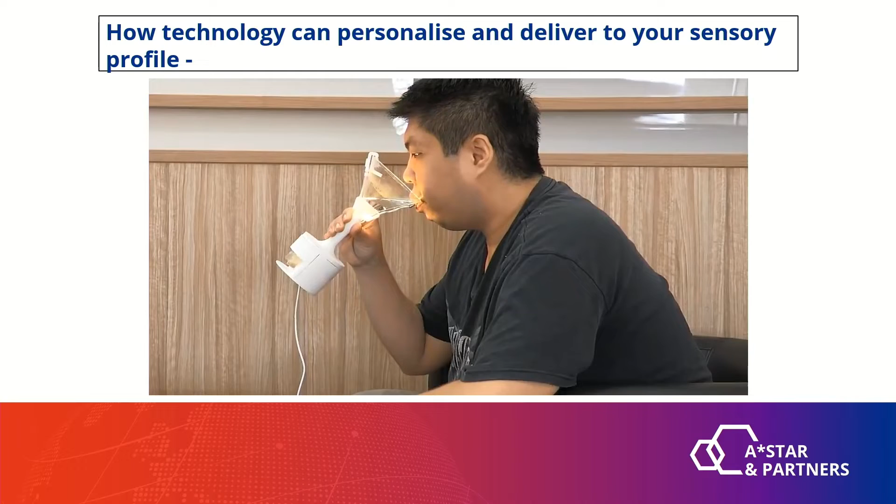Without the need for excessive additives, everyone can enjoy any drink that they want. You can also share drink information with each other, recreating drinks digitally. So even drinking has become virtual, where you can change the color, the flavor, the aroma, and suit it specifically to your need.

Let's talk about another example, Shiseido Optune, which is able to provide you a very personalized skincare system. It can scan your face and identify what your specific needs are, and out of 80,000 possible combinations, figure out the best one that will work for you. Another classic example of personalization.

Wherever there are good margins, wherever the brands are not very big and new brands can find a play, wherever the regulatory pressures are not very high, you can see hyper-personalization rapidly growing. It's already big in cosmetics, it's growing into clothes, it's growing into leather goods, and now slowly coming into the FMCG space. Even in medicines, for example in nutraceuticals, it seems to be making strides.

What are some of the challenges in implementing hyper-personalization in the industry? The first is that if you have brownfield sites with mass-scale production, the change from mass-scale production to hyper-personalization is not an easy one. It is challenging because it would require a completely different infrastructure.

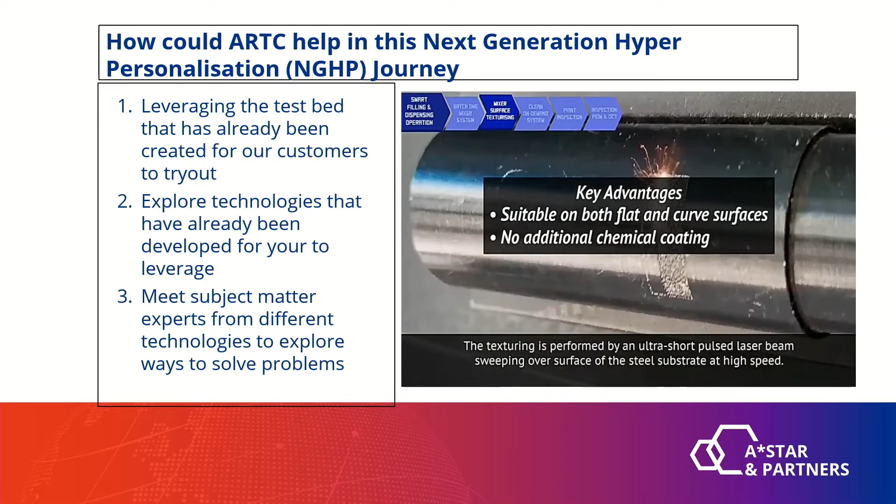Textured surfaces of the mixers minimize fouling and waste, reduce cleaning frequency, and increase process yields. Cleaning systems can be activated on demand to ensure adequate cleaning for the next run.

Every hyper-personalized product undergoes rigorous screening and testing to assure the highest quality for your customers.

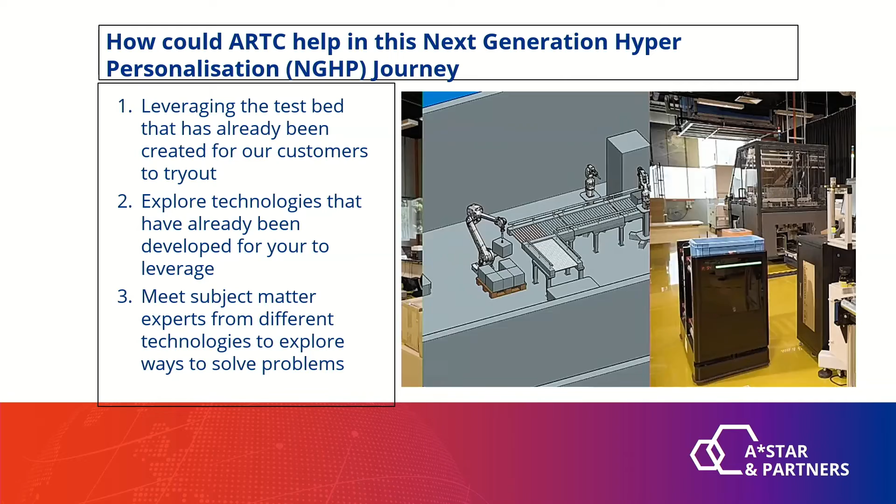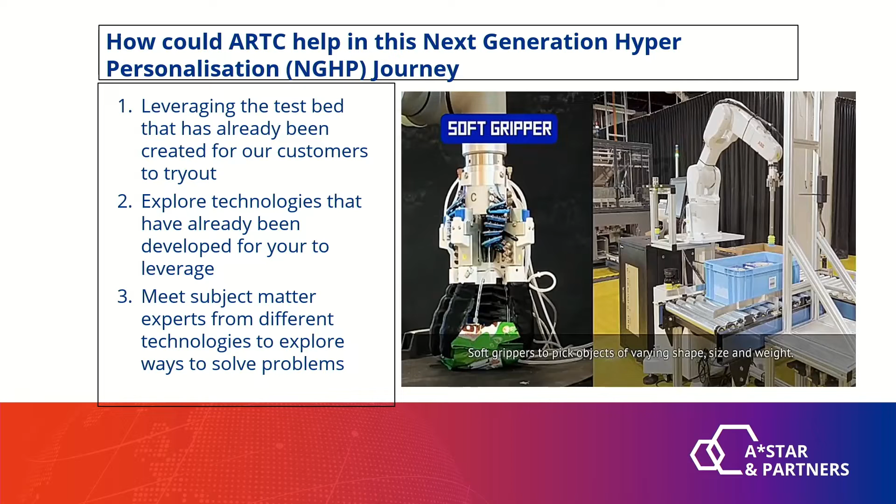Once inspected, our autonomous robots work seamlessly in tandem to consolidate orders from the automated depalletizing line, where cartons of goods are removed from pallets, uncased, and efficiently arranged, no matter how fragile your product. A touch of personalization completes the package, bringing timely deliveries with best-in-class services to wow your customers. Ensure your logistics fulfillment and grow your business.

So we at the Advanced Remanufacturing and Technology Center, which is a public-private partnership, have invested $20 million on setting up this hyper-personalization line, a test bed. You're all very welcome to visit it and see how it works.

If you have products that you want to explore or want to try out, you're again very welcome to connect up with us, and you can meet subject matter experts in different areas. We have already identified about 13 work tracks that we have developed. Some of them are unique and different. And again, as you understand them and test your products, you might be further encouraged to progress on to this process of hyper-personalization.

Feel free to connect up with me at any time if you're interested to know more about this. Thank you, and thank you very much.

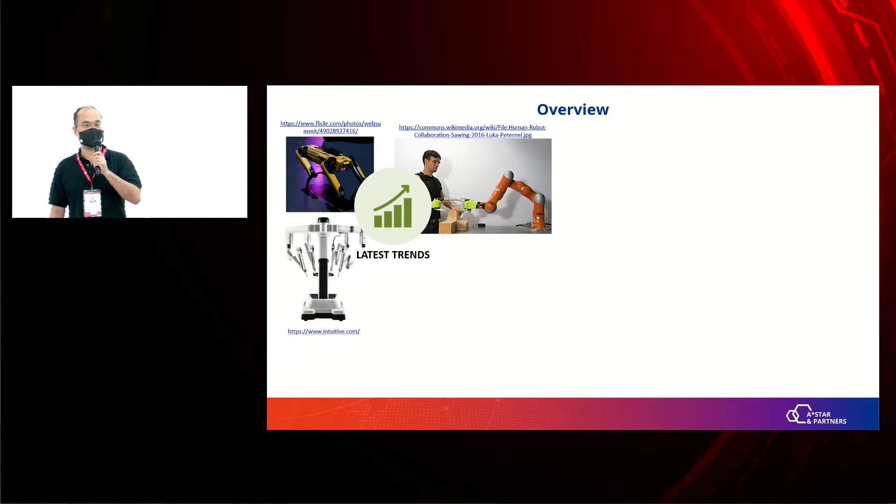Firstly, I'll do a quick cover on the latest trends in robotics, after which I'll take this opportunity to share with you some of our past as well as ongoing work in robotics, as well as some of our past achievements. And lastly, I'll cover sustainability, some of the applications in sustainability, as well as the role of robotics in these applications.

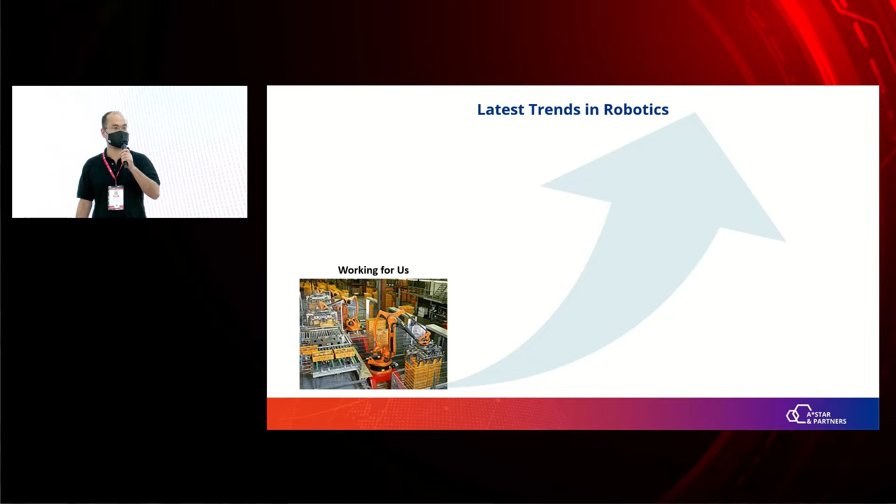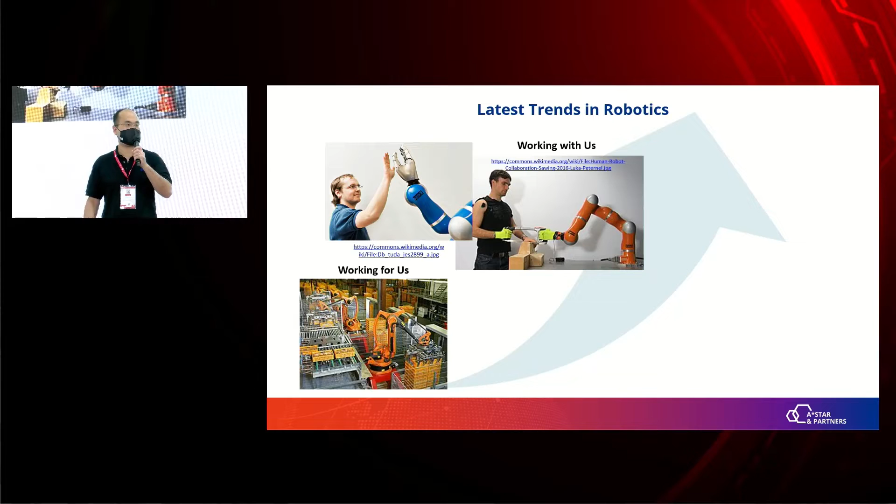Robots used to work for us, performing repetitive actions in cages, separate from humans, with no contact with humans and the environment, and unable to react to uncertainties. Slowly, with advancement in robotics, robots are starting to be able to work with us through the use of sensing, as well as intelligence capabilities, so they are able to take in information from the surroundings and react to them, performing their work around with us.

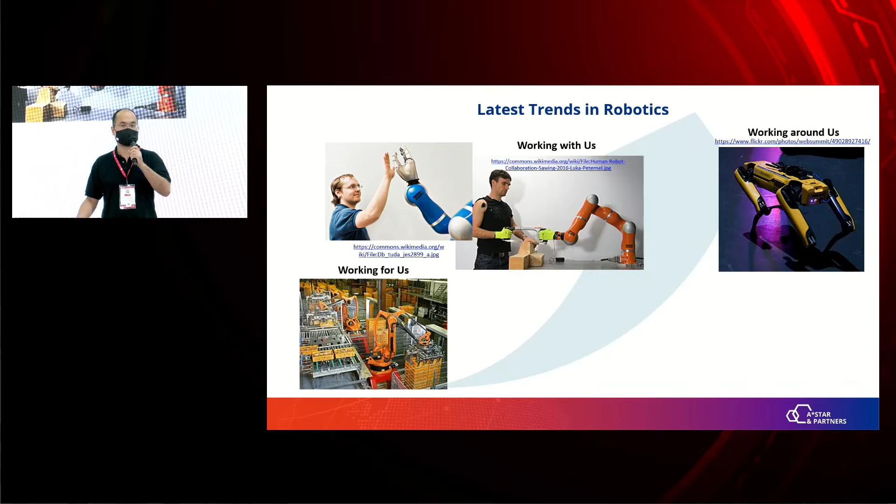And with the advancement of legged robotics, research achievements in this area, especially from Boston Dynamics, robots are able to work in a human-centric environment. That is, they are able to overcome obstacles that were previously thought impossible for robots to overcome. Lastly, with new dexterous robots as well as smaller robots, robots are performing their work inside of us. Surgical robots that assist surgeons in performing surgery, as well as concentric tube robots or endoscopic robots that can go through keyholes within our bodies and perform surgical operations.

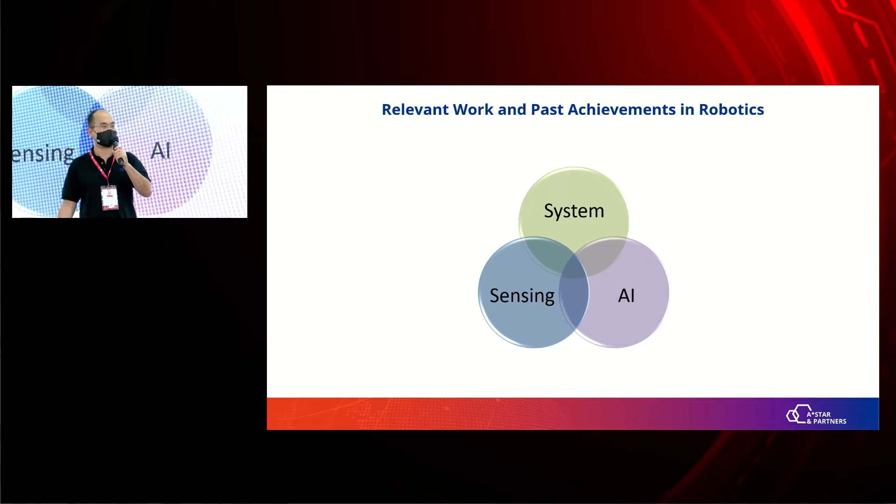Now I'll take this opportunity to share some of our past work. Robots are essentially comprised of three main elements: firstly, the physical system, the physical embodiment of the robot that reacts and acts on the real world; as well as the sensing component that takes in information on the environment and provides this data to the intelligence portion in order to react to changes in the environment and react to uncertainties. The intelligence portion will pass these commands to the physical system in order to react with the real world.

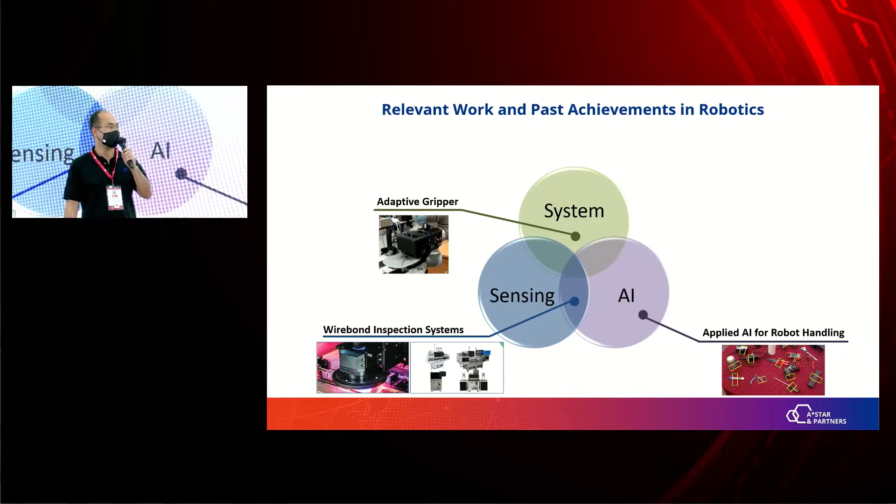We have past work on adaptive grippers, wirebond inspection systems, as well as applied AI for robot handling. If you're interested in these areas, you can contact me after that. For today's presentation, I'll cover a bit more on our work on modular reconfigurable mobile robots, automated lab sample preparation, as well as automated coning and deconing.

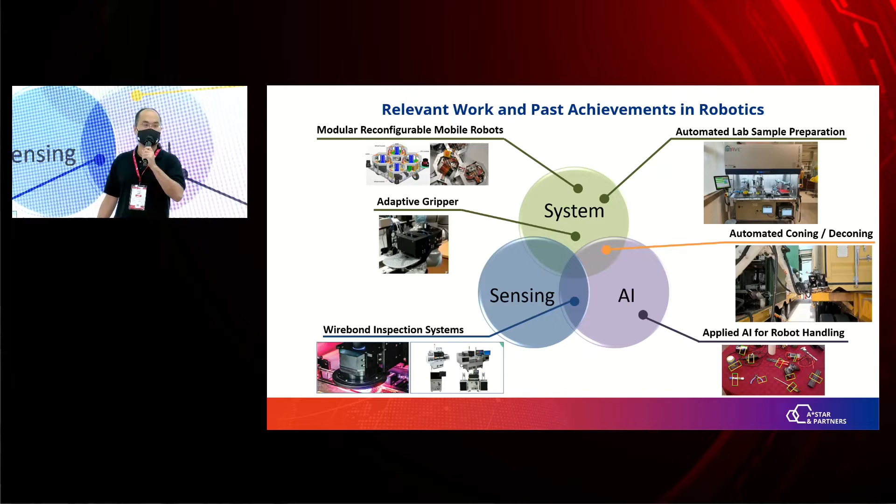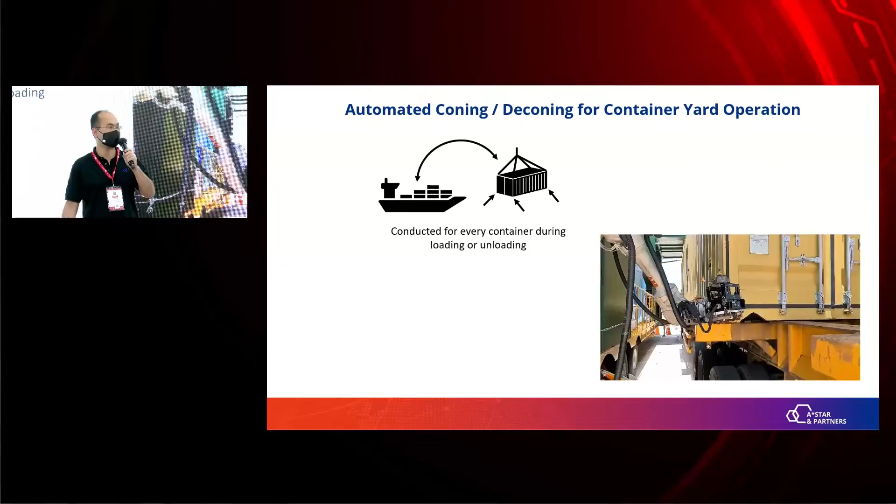Coning deconing is an operation conducted daily in the container yard. This is a manually intensive operation that involves the removal and insertion of twist locks and cones into the corners of the container every time a single container goes on and off the container ship. This is to secure the containers together so as to prevent them from falling over during the sea voyage. Considering that this has to be done every time for each container, and considering that we are the second busiest port in the world, this is a very labor intensive operation, and automation is required to help reduce the reliance on manual workers.

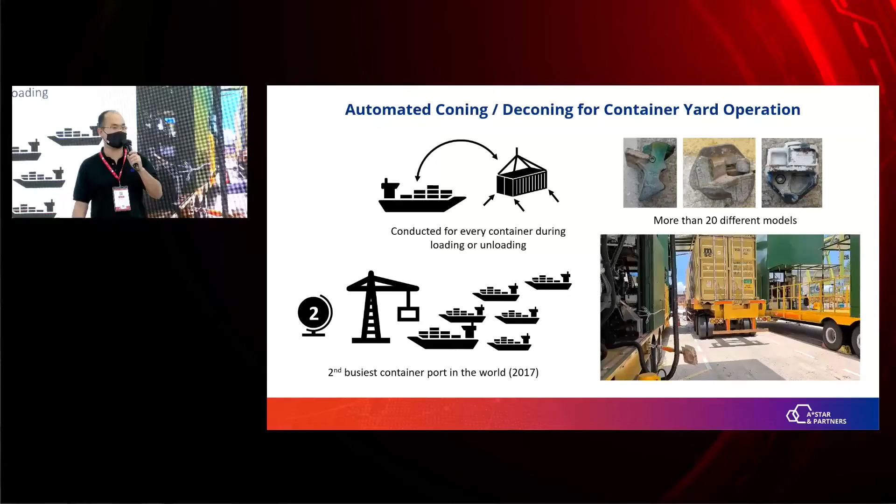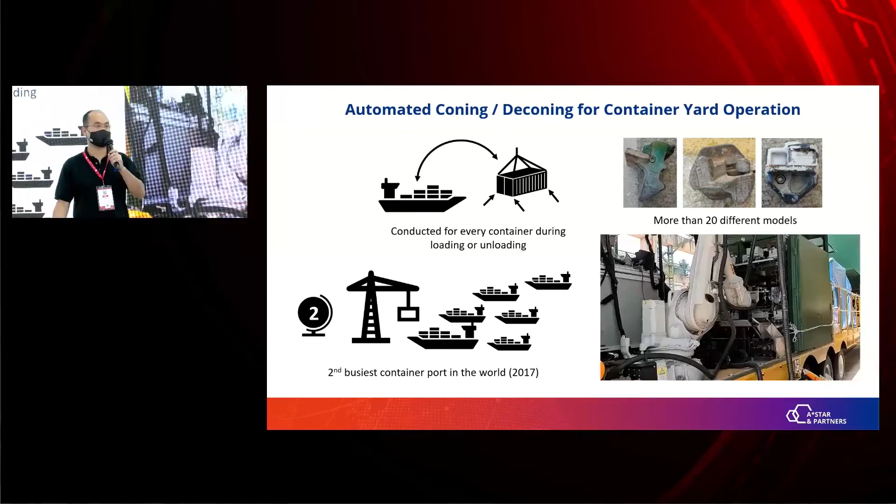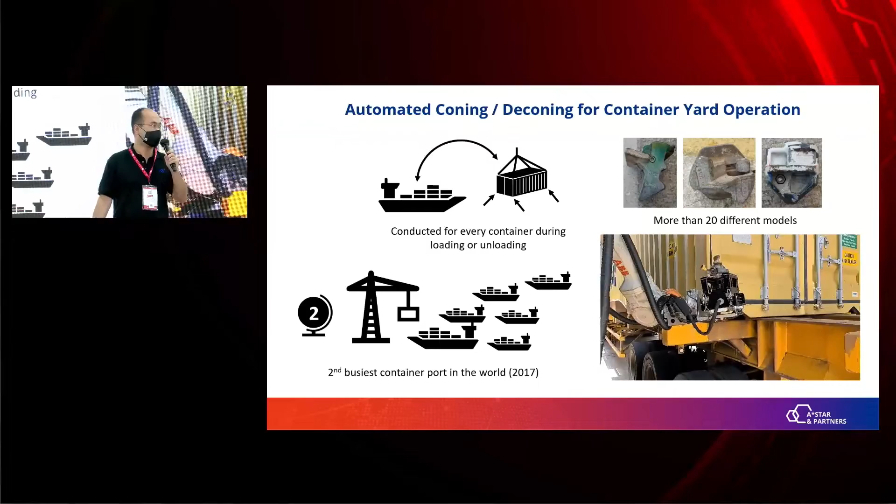However, this process is difficult to automate, considering that there are more than 20 different types of twist locks and cones currently being used. You can see from this video here, we have implemented this solution using 4 robot manipulators mounted onto movable platforms, using adaptive grippers as well as 3D sensors to perform this coning deconing operation for a subclass of these 20 different models. We are not able to handle all of them, but we are able, through the use of adaptive grippers, to handle a class of the more commonly used twist locks and cones.

Our work on modular reconfigurable mobile robots is inspired by the need from the industry. There are many different types of varied requirements and conditions from the different end users on mobile robot solutions, and customization is normally required. There's no one-size-fits-all solution.

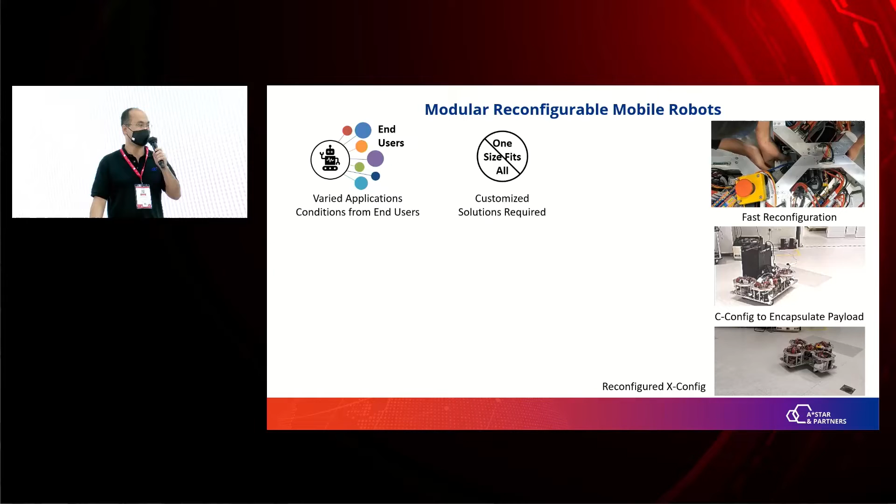Even those off-the-shelf mobile robots that you can purchase, you need to make quite a number of customizations before it can be used to meet the different needs of the end users. Sometimes the needs are so varied that you need to actually build a customized mobile robot in order to fulfill the requirements from the end user. However, no matter which approach you take, it is very costly to customize in terms of manpower, resources, as well as time.

Through this, we have proposed the use of functional building blocks, elements of mobile robots that can be combined together to form different types of mobile robots that meet the different needs of the end user, to create task-optimized mobile robots quickly. As you can see from the top right video, we can do this fast reconfiguration using these building blocks and achieve a customized mobile robot within 30 minutes. The example we show here is a C-shaped configuration robot that can encapsulate the payload from our industry partner in order to form a singular autonomous mobile robot quickly.

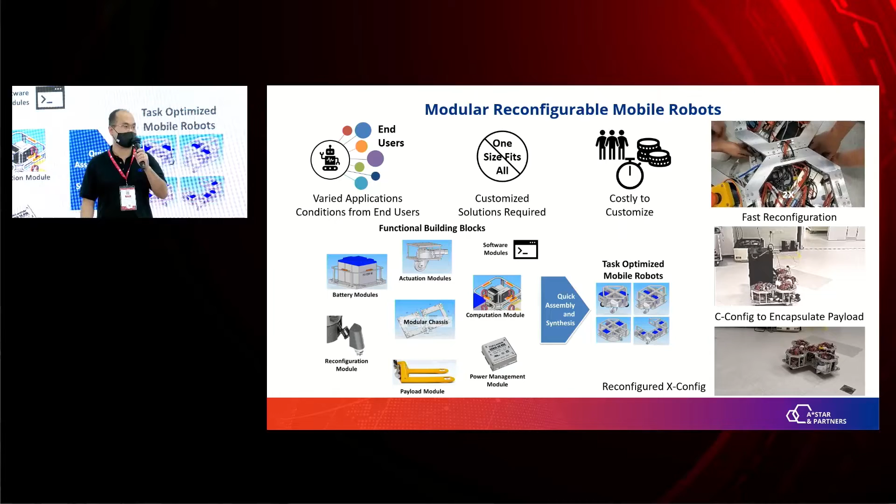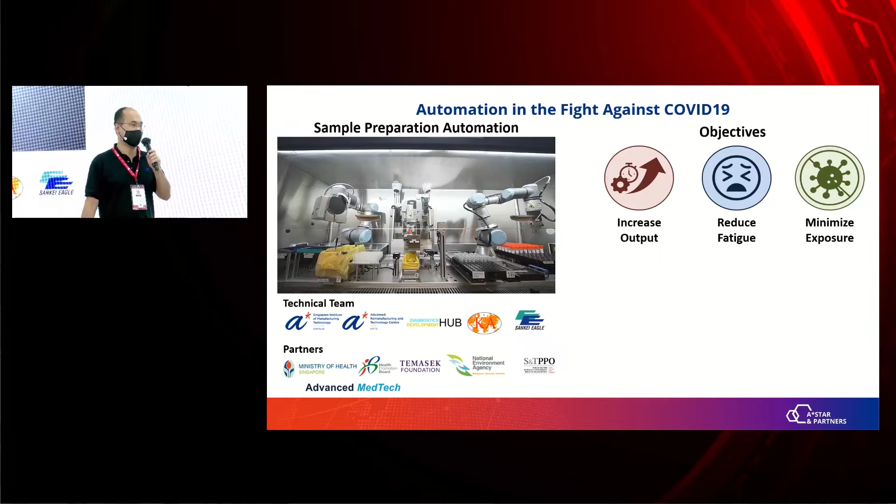Now I'll touch on some of the projects that we did related to the fight against COVID-19. This is a sample preparation automation we developed to automate the process of sample preparation for COVID-19 PCR testing. These test tubes are collected from the public, and the liquid needs to be transferred into different vials, as well as to the 96 well plate. This is normally done by the lab technician wearing full PPE, working with the bio booth, and it is a mentally as well as physically exhausting process, as they have to transfer accurate amounts of liquid into the different vials.

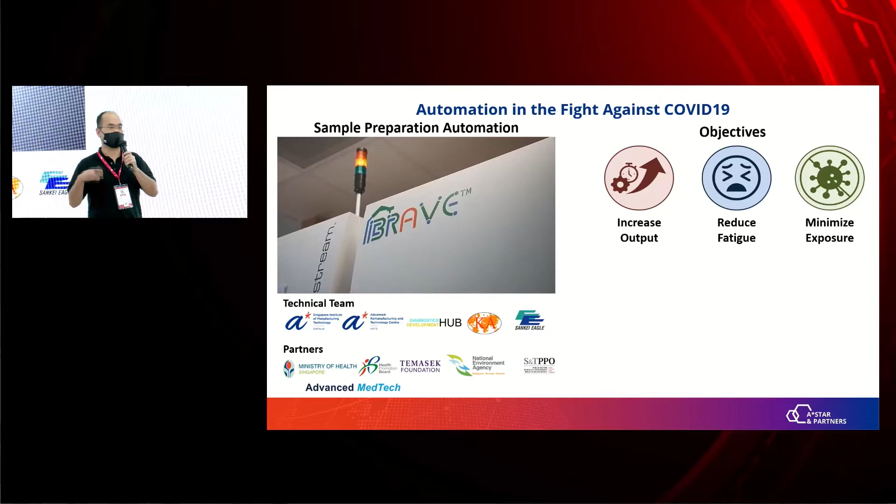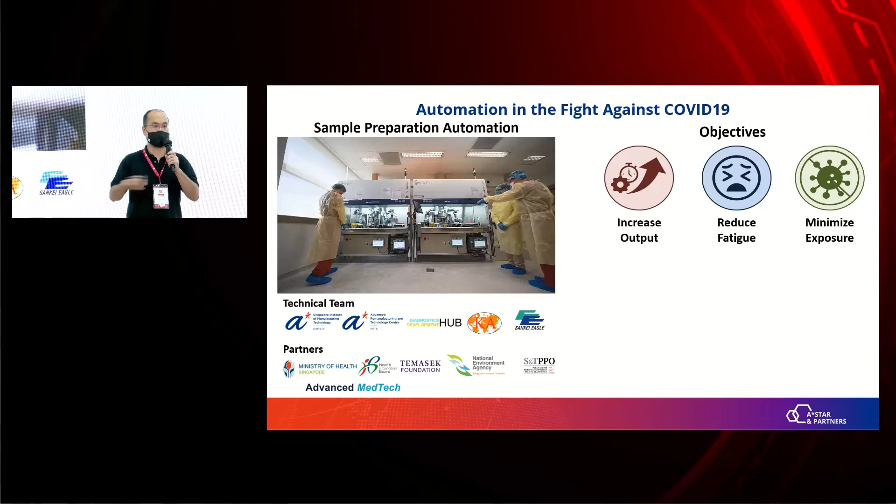In this automation solution, we have created a way to automate this sample preparation process. We have managed to increase the output, at the same time reduce the fatigue of the lab technicians, as well as minimize their exposure to COVID-19 which they may come into contact with when handling these liquid samples. We have deployed multiple systems across many different labs in Singapore, and at the same time created new business opportunities for our industry partners that worked with us on this solution.

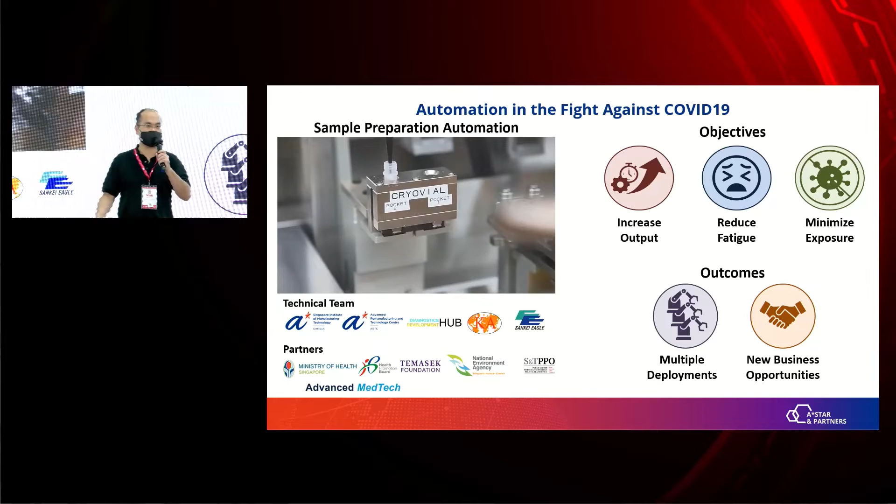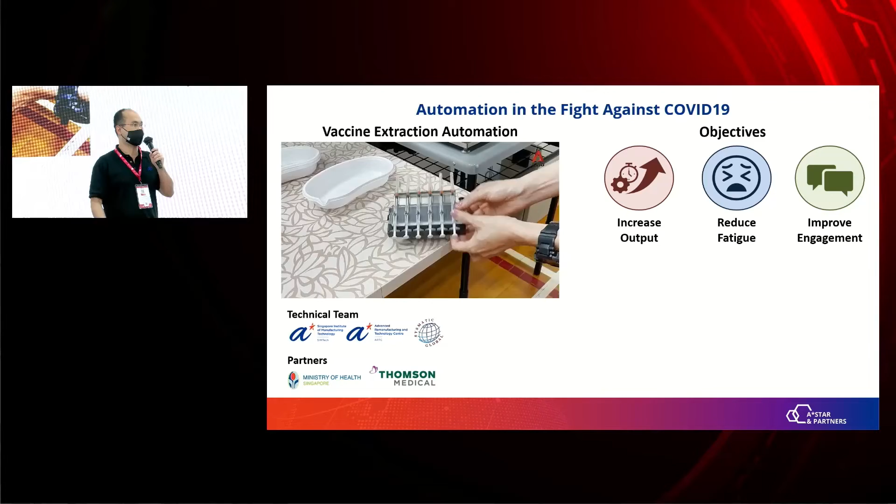This is another automation solution we've done in the fight against COVID-19, for vaccine extraction, where we help the frontline workers, the nurses, to push up the vaccination rate in order to enable the new normal. They have to accurately extract the vaccine from the vaccine bottle for every syringe in order to perform the injection, and this is quite an exhausting process for them.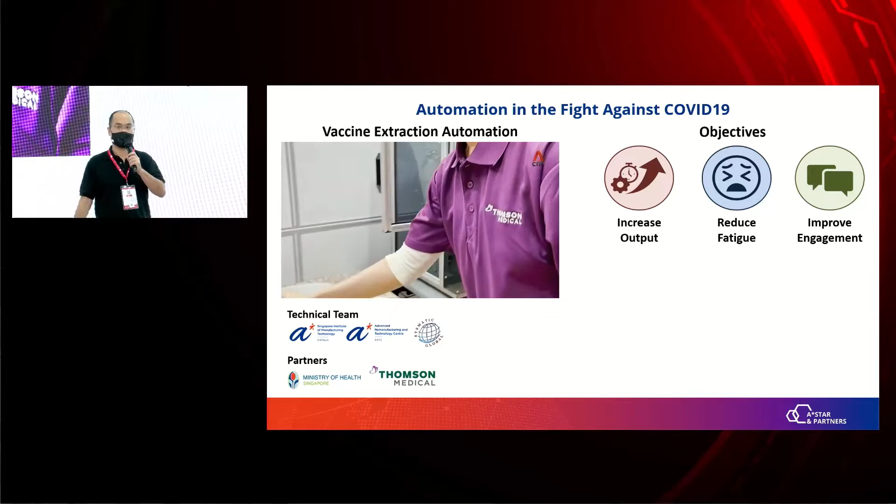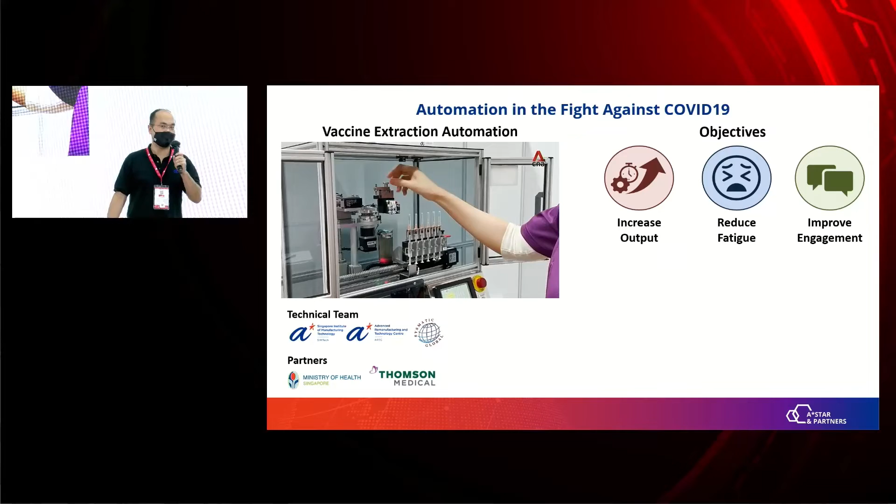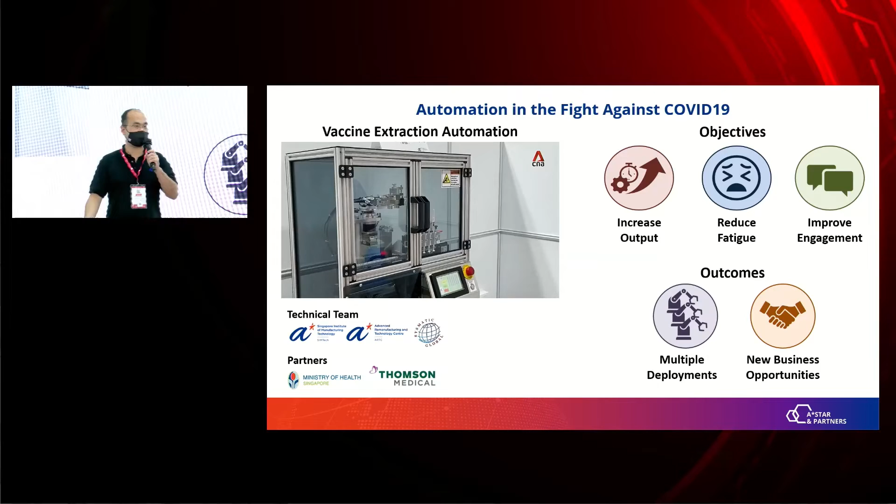We have created this automation solution to increase their output so they can attend to more people coming for vaccination every day, at the same time reduce their fatigue, and improve engagement between the nurses and those coming in for vaccinations. So the nurses do not have to concentrate on extracting the vaccine into the syringes. Similarly, we have deployed multiple of these units across different vaccination centers in Singapore, and we also created new business opportunities for our industry partner.

Now I come to the last part of the presentation, on the role of robotics for a sustainable future. Sustainability is becoming a more important topic in the world today, and there are new applications related to it, for example in renewable energy, advanced agriculture and aquaculture, waste recycling, reduction of carbon emissions, collection of rubbish from the oceans, as well as battery recycling. With these new applications come new opportunities and challenges for robotics.

For example, robots can collaborate with humans in order to minimize the danger to humans in these new applications, reduce the physical demands on humans, minimize the need for humans to work in unpleasant working environments, as well as reduce the amount of tedious or repetitive work that humans have to do. For my talk today, I'll cover three main applications.

Firstly, it's on waste recycling, which is an important aspect of the circular economy in order to keep resources within the economy, as well as to minimize the dependency on the extraction of new resources and to reduce the need for handling of this waste disposal.

For my presentation today, I'll focus on the role of robotics in battery recycling, which is becoming more and more important with the electrification of transport, where the demand for batteries, as well as handling of battery waste, will increase.

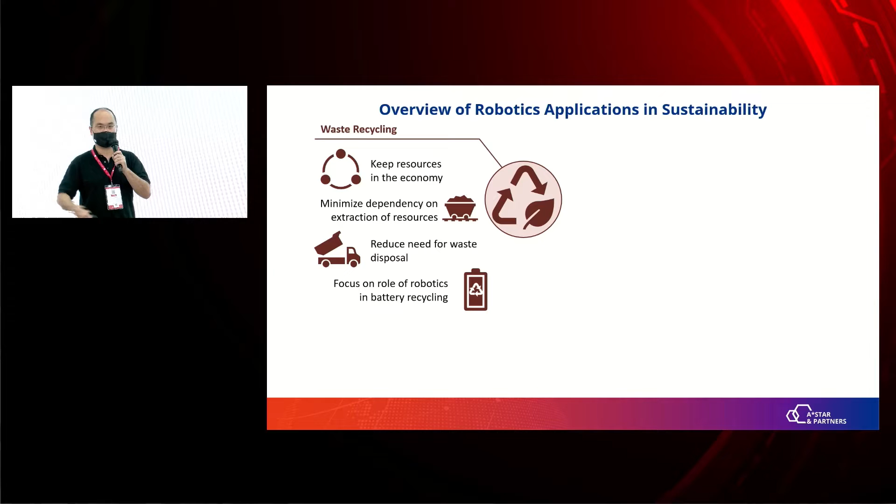The next area is on agriculture and aquaculture, where food security is an important aspect of a sustainable society, and food security is also a major concern locally. And there's a growing amount of interest with investments and new startups in this area.

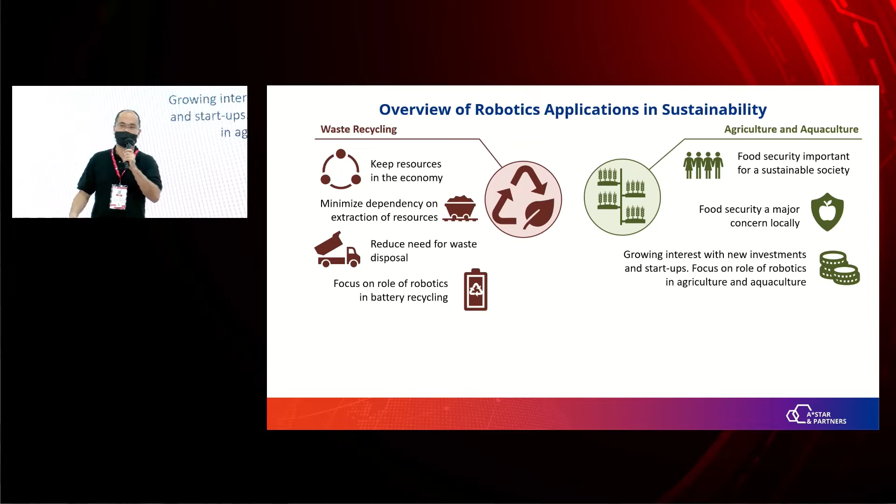Today I'll focus on the role of robotics in the automation of some of the processes within agriculture and aquaculture. Lastly, I'll touch on renewable energy.

Generation of electrical power is contributing to almost 30% of all carbon emissions by humans worldwide, and there has been recognition of this. There's 134 commitments made in the Paris Agreement to increase the amount of renewable energy sources.

For today's presentation, I'll focus on the role of robotics for offshore wind farms, where there's a growing number of these offshore wind farms.

In the robotics for batteries and waste recycling, as mentioned just now, with the surge in the electrification of transport, there'll be a surge in demand for batteries as well as processing the battery waste.

This is a quite sizable market at $10 billion in 2020, and it's growing at an 11% compound annual growth rate. And recently, Ford has invested $50 million in a battery recycling startup, as well as opening a battery recycling center in Tuas.

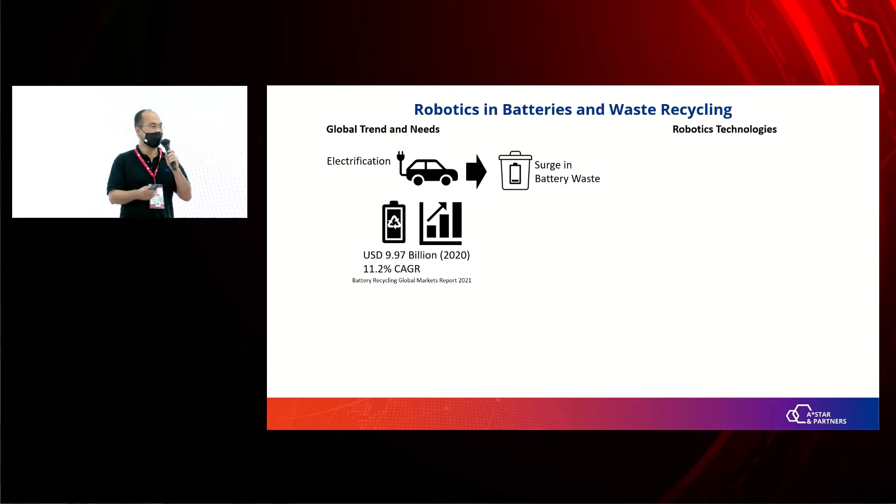Disassembly is a process within this battery recycling which is manually labor intensive, and it's also dangerous, where there can be fire hazards if batteries are not properly discharged, or humans can come into contact with corrosive elements due to the electrolytes in leaking batteries.

For this, robotics can contribute in this area through the development of adaptive grippers to handle the different types of disassembly process required, and also to handle the different types of battery packs.

That is just the physical element. Vision and AI is required in order to adapt and to guide the robot to adapt through the different types of disassembly process required on the different battery packs.

And finally, also hyperspectral imaging, where we can use it to identify different types of material compositions in order to do the waste sorting, which is not just limited to battery recycling, but also to recycling of different plastic materials as well as general waste.

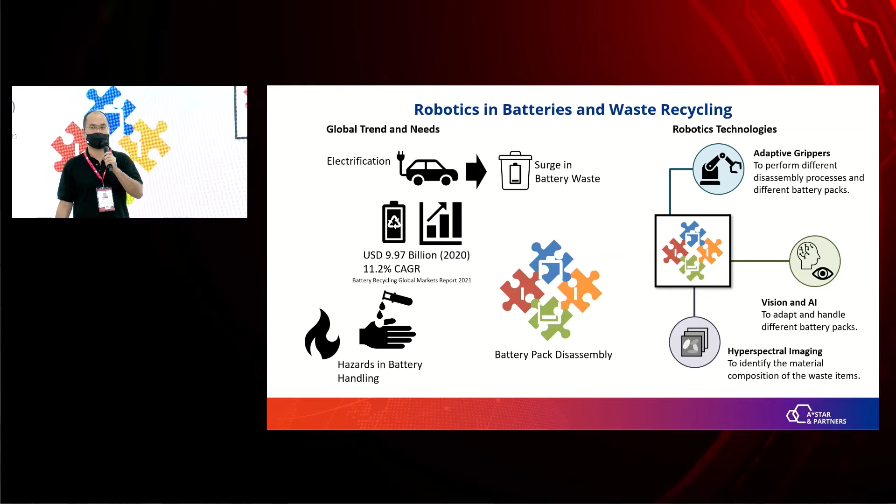For robotics in agriculture and aquaculture, as I mentioned just now, this is a major concern locally with the push for 30 by 30. However, there's a lot of labor-intensive processes within this agriculture and aquaculture.

Our collaborator from NUS, Professor Raye Yeow, will later give a talk on soft robotics.

In addition to the physical element, the vision and AI part will come in to guide the robot to properly handle and know where to handle the produce and livestock, as well as to do quality control, counting, and grading.

And lastly, for offshore fish farms, the use of underwater robots to monitor the water conditions, as well as to do counting of the fish stocks.

Now come to the last application, which is in offshore renewable energy. As I mentioned just now, there is a shift towards renewable energy worldwide, and offshore wind farms are expected to grow at a 30% cumulative annual growth rate from 2020 to 2025.

In our area, for China alone, the capacity is going to grow from 6.8 gigawatts in 2019 to 50 gigawatts in 2030, 8 times growth within the next decade.

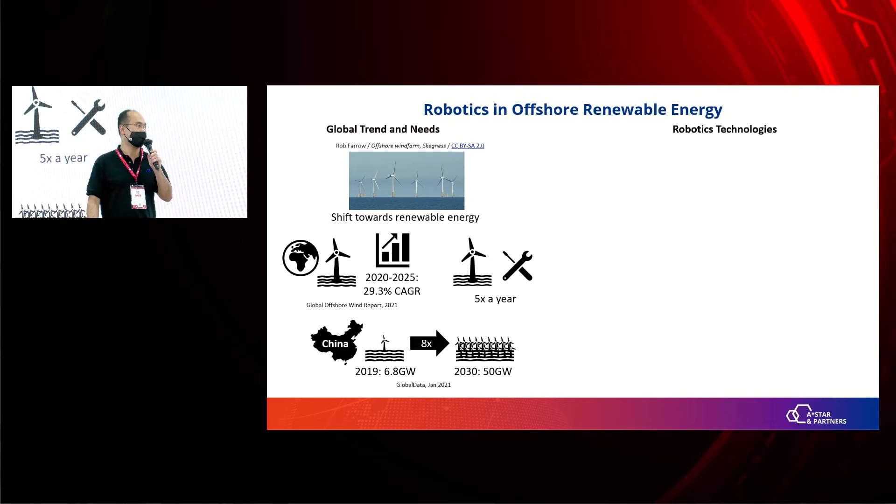Considering that each offshore wind turbine needs 5 maintenance visits a year, and with each offshore wind turbine at 3 megawatt capacity, this will translate to thousands of offshore wind turbines, as well as tens of thousands of visits required every year. In the conduct of this offshore maintenance, there's one process, which is the transfer of people from the maintenance vessel to the offshore wind turbine.

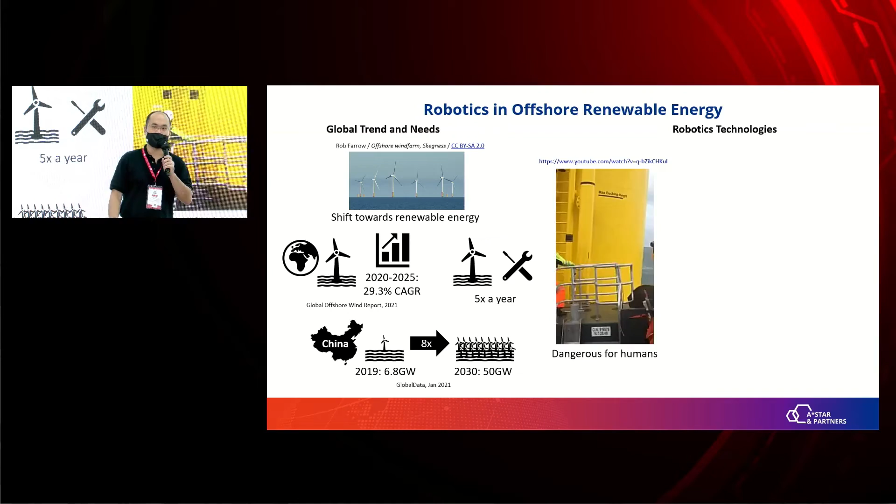This, as you can see from the video, can be quite dangerous depending on the weather conditions. Robotics can come in to assist in this to reduce danger to humans through the use of offshore drones, where we do not need to transfer humans or materials from the maintenance vessel to the wind turbine, and just through the use of drones do the inspection.

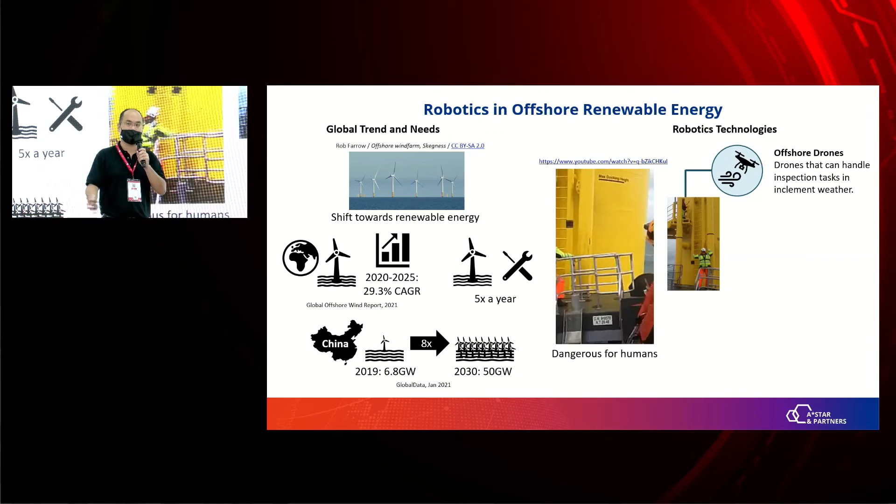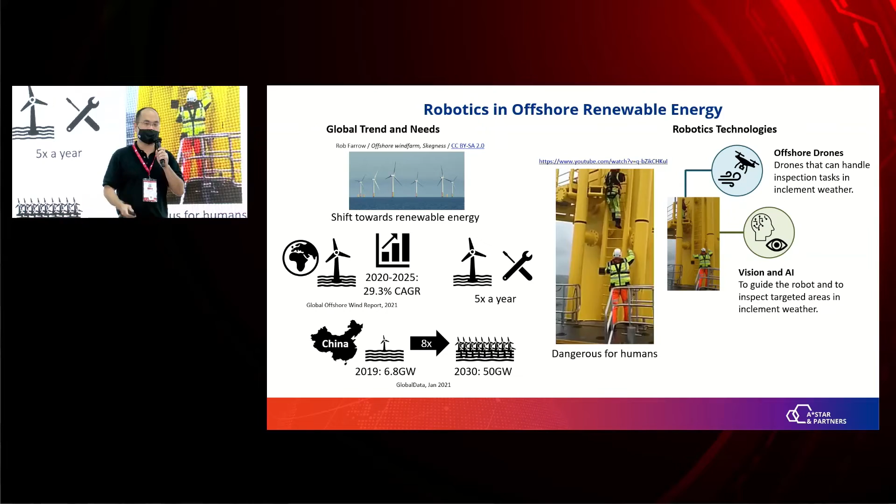However, there's a challenge in this because of inclement weather conditions, especially since these areas are likely prone to high winds, which is why the wind farms are situated there. So we need controllable flight and good quality images for inspection using these drones, as well as AI and vision to guide the drones to different areas to conduct inspection and capture good quality images even in changing lighting conditions or rain.

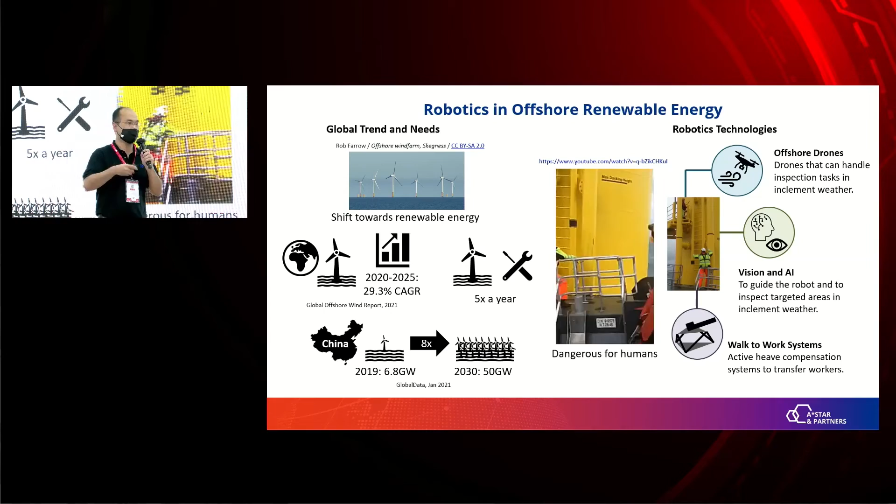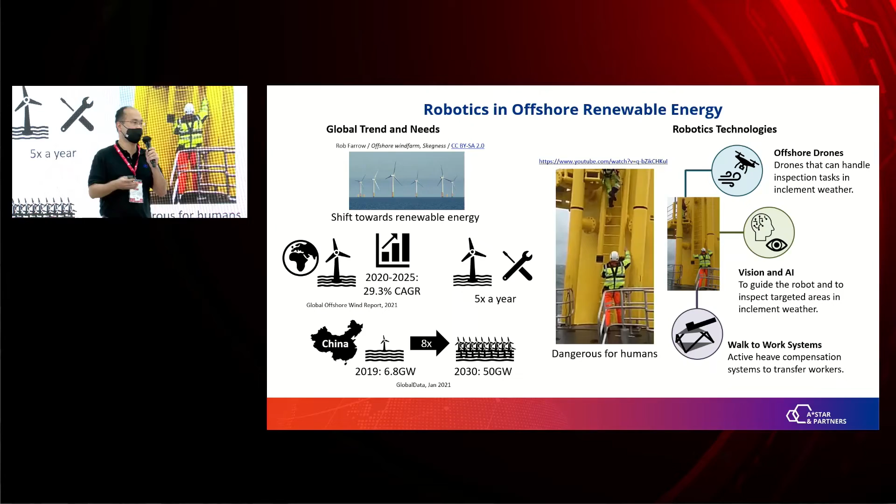Lastly, not all operations are based on inspection. Sometimes physical contact is required that cannot be done by drones. We still need to transfer humans from the maintenance vessel to these offshore wind turbines. For this, we use walk-to-work systems, essentially large robots that move and compensate for wind and wave actions on the vessels, enabling safe and stable transfer of people between the maintenance vessel and the wind turbine.

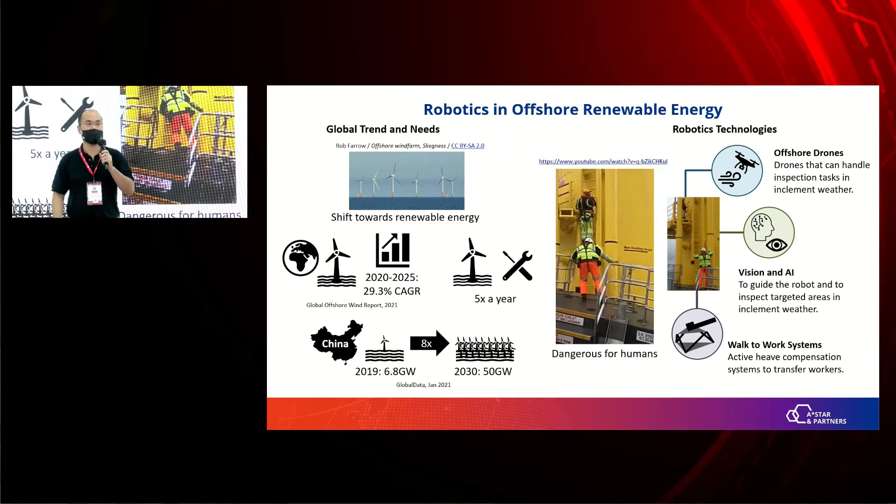Now I've come to the last part, finishing up my presentation. The robotics capabilities within A*STAR are not just limited to SimTech. We have many other institutes working on different areas of robotics, under the Robotics Horizontal Technology Programmatic Office in A*STAR, combining capabilities in navigation and perception, soft robotics, adaptive end effectors, reconfigurable mobile robots, system development, as well as simulation, modeling, and optimization.

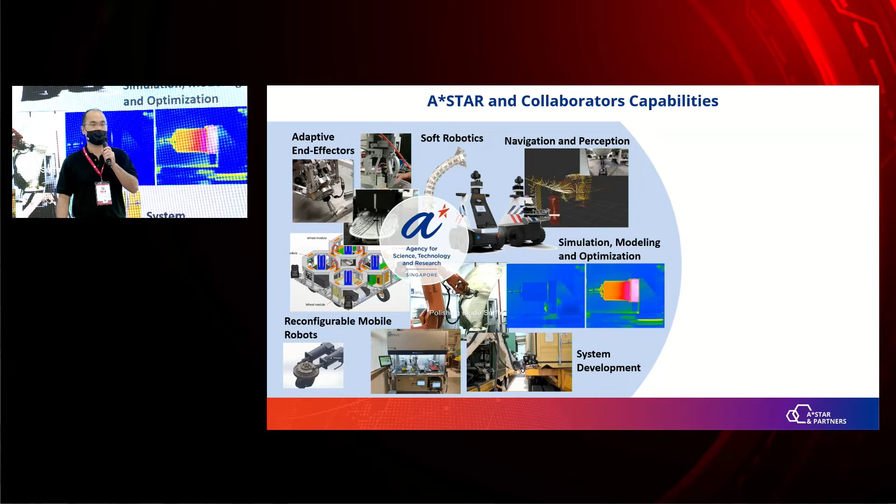We collaborate with our partners from the Institutes of Higher Learning, such as NUS, NTU, and SUTD. Our collaborator from NUS, Professor Raye Yeow, will come up later to talk on soft robots. We also have collaboration on construction robots and human-robot collaboration.

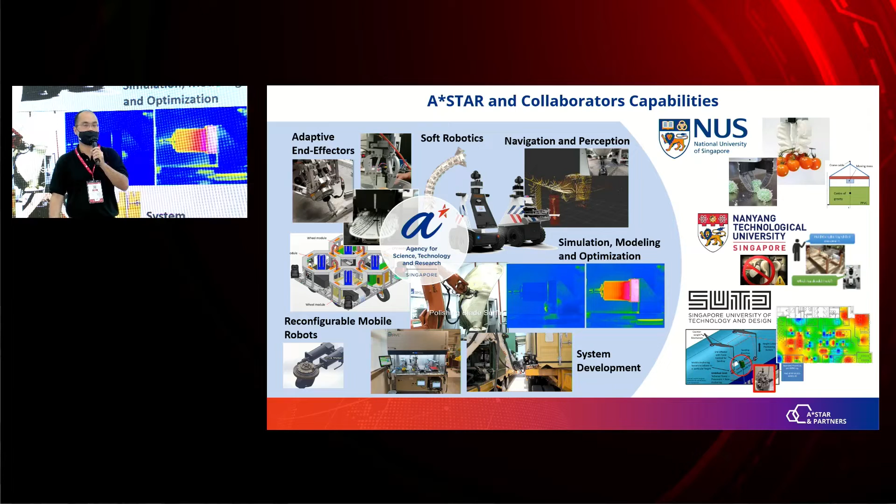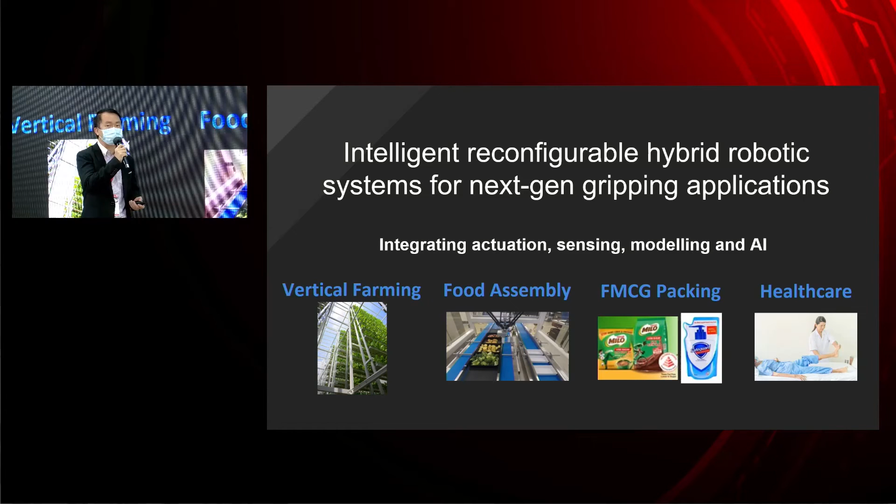This is for use cases like vertical farming, food assembly, FMCG packing, as well as healthcare. Today we'll look at two main aspects: food assembly and FMCG packing. I want to bring attention to two types of gripper systems we've developed. One is the gourmet gripper, developed with colleagues from NTU, SUTD, and A*STAR, working alongside CGH and SATS, to develop a gripper that can manipulate processed and raw food items less than a kg, with a grip width of 3 to 7 cm, large enough to cover most food items.

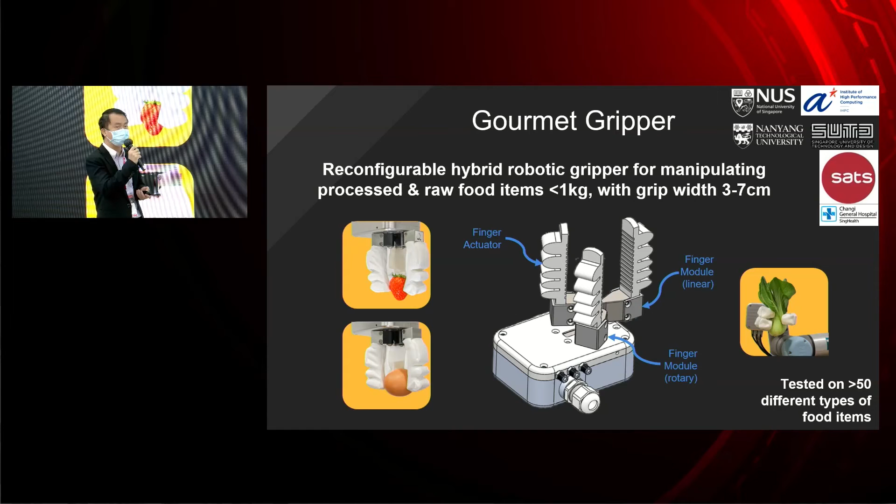As you can see here, we have covered over 50 different types of food items with just one single gripper. Delicate things like eggs can be easily gripped, as well as fruits like strawberries and cherries, and vegetables too.

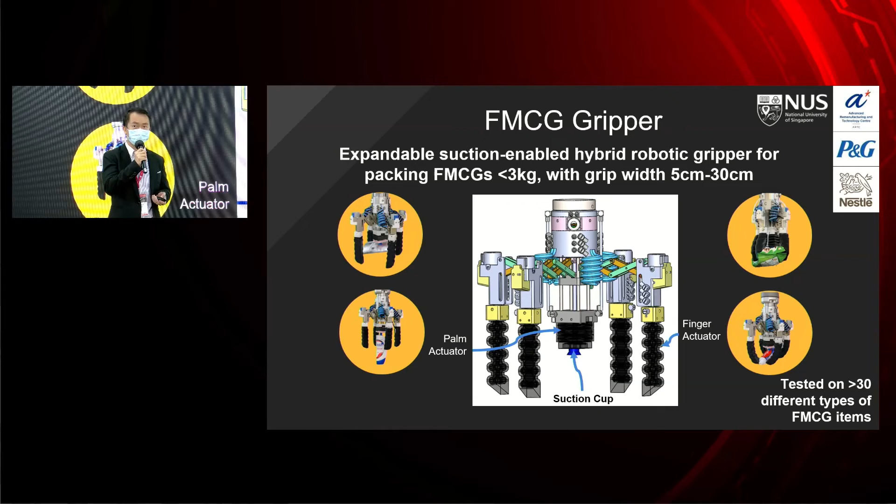The other gripper system we are developing alongside the first speaker for this session is the FMCG gripper. It's a suction-enabled expandable gripper that can expand depending on the items being picked. Its grip width ranges from 5 to 30 cm, covering items like a Milo refill pack that's highly deformable, a shampoo bottle, or a pack of cup noodles. Currently we can pack up to 3 kg.

Our systems involve two things. Apart from actuation, we're also looking at sensing, which makes use of vision and tactile sensing combined to give us intelligence of how the object looks and feels. Let me show you a video to demonstrate this.

Within our gripper we have embedded vision that allows us to recognize, for instance, a Milo bottle. If it's a Milo bottle, we use suction. If it's a packet of refillable Milo powder, we use the gripper instead. So it's quite versatile in that aspect. Let's move to the next video.

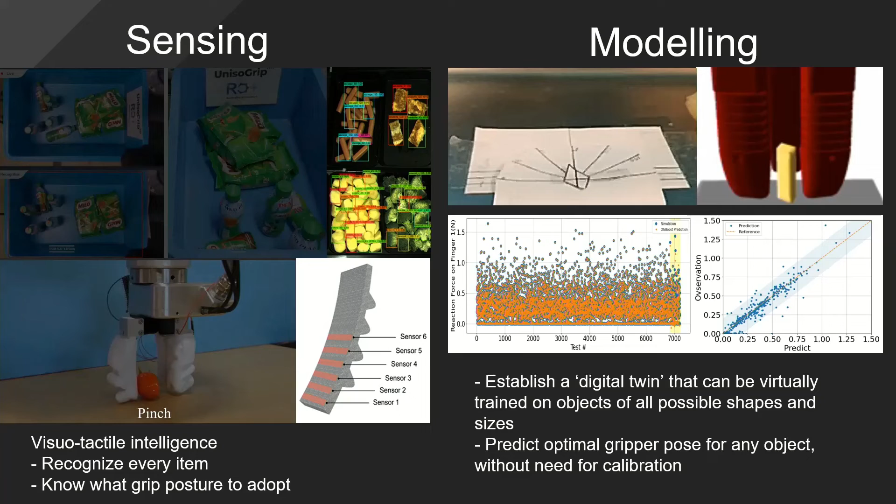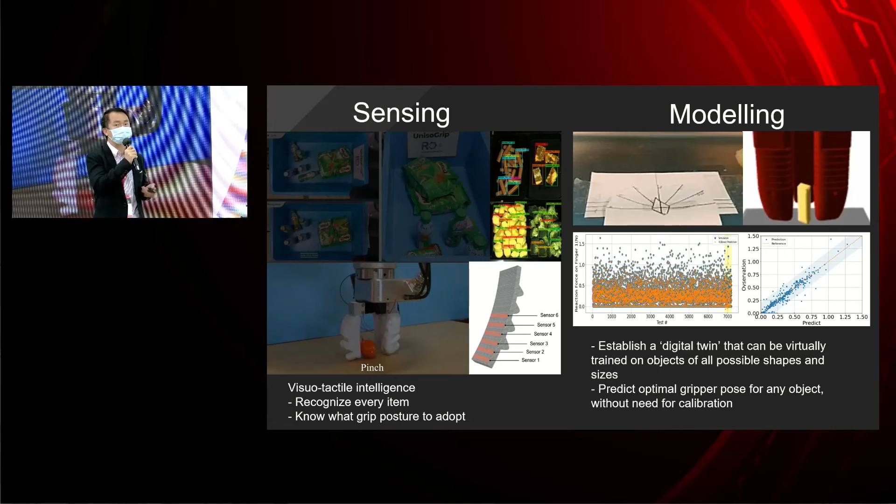Here you see a modeling program we are working on, where we try to model the gripping action. We do this because we can't physically pick all 1 million items out in the food space, so a lot of things have to be done virtually. If we can virtually train the system to learn how to pick all kinds of shapes and sizes, we transfer that intelligence back to the real-world gripper, so it can see an item and grip it successfully in one instance. That's the digital twin we are looking at.

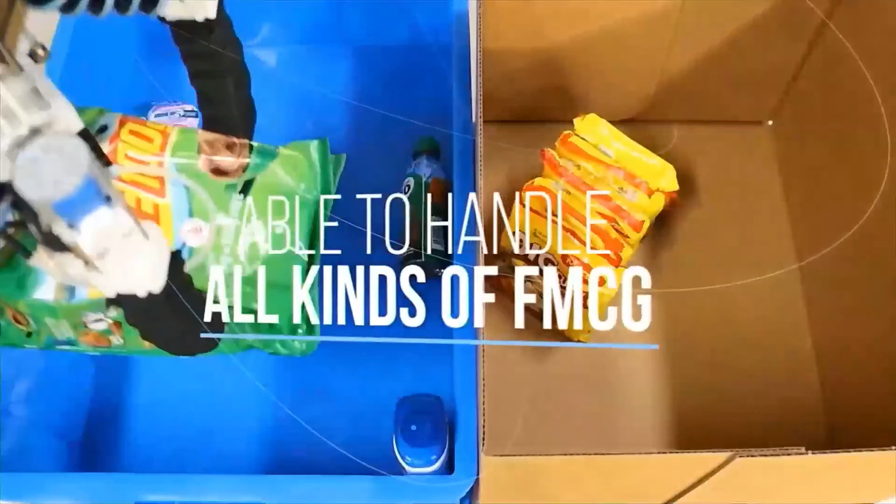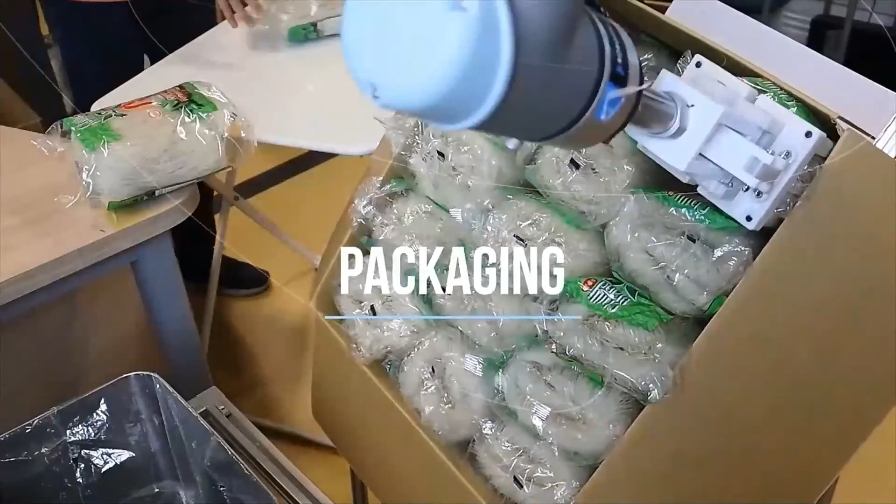As you can see in this video, we develop all kinds of custom grippers, and some of these are very good at packing a range of fast-moving consumer goods, as well as food items that can be easily packed into a bento set and conveniently delivered to customers.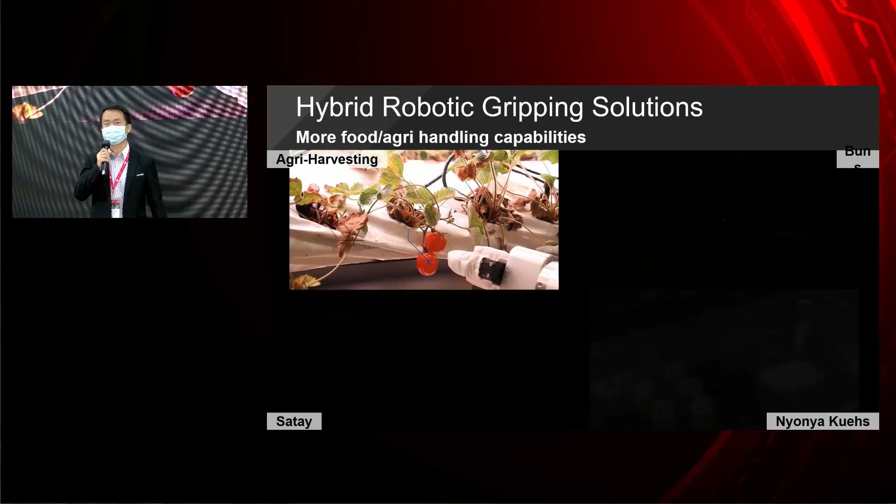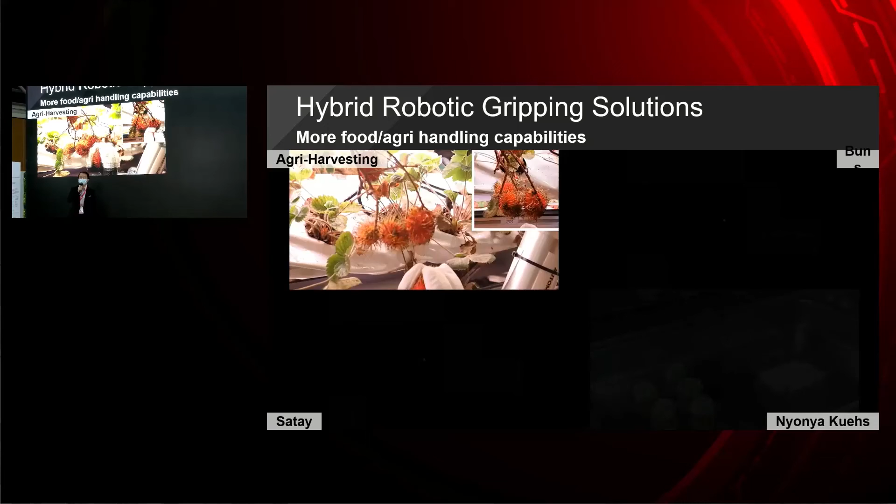This is how we can use it to pick fruits, different types of fruits, and possibly vegetables. This is an area we are looking at.

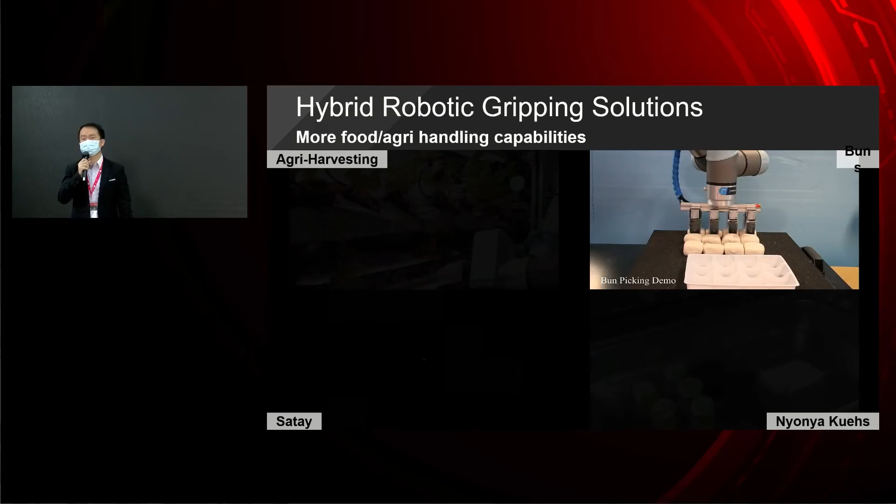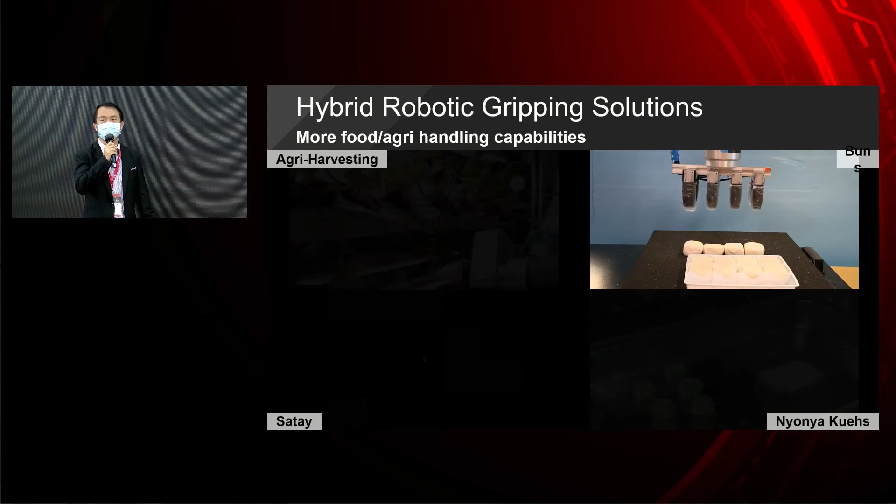Working with a local dim sum company, we're trying to pack delicate items like Chinese buns and siu mai. We can pack these quite efficiently without damaging the food items.

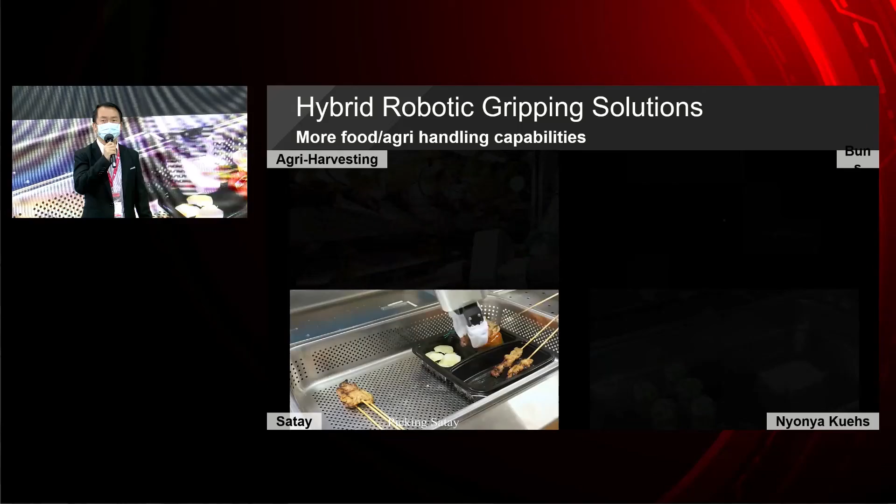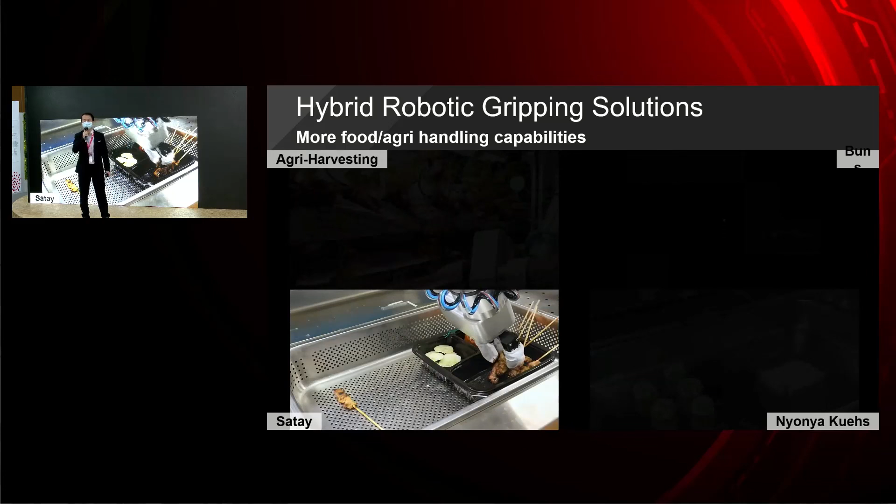Here is where we can also customize packing of interesting or oddly shaped food items that usually can't be picked with a traditional gripper.

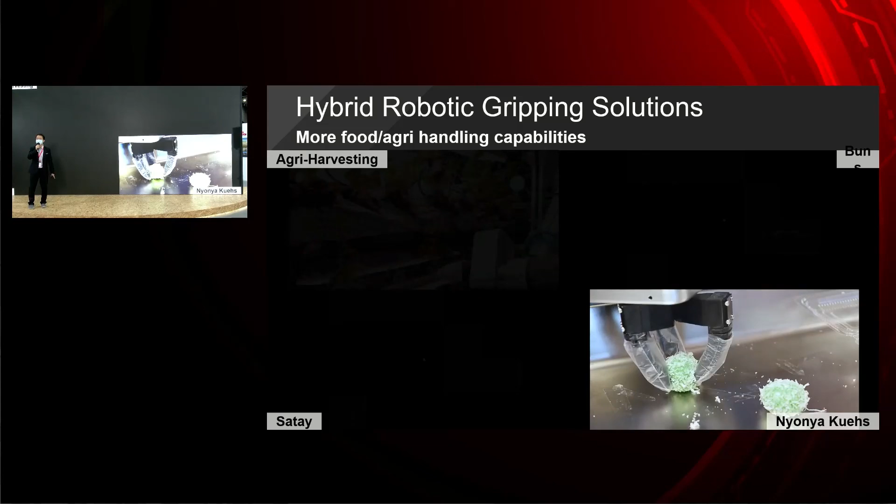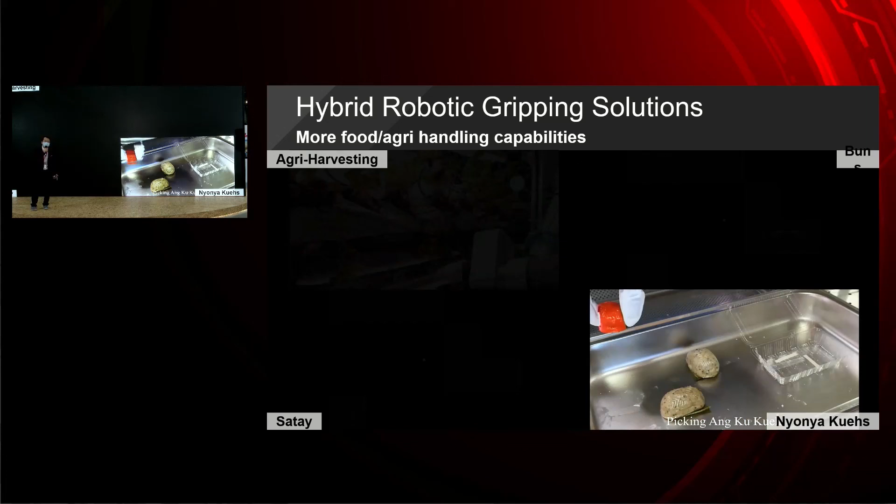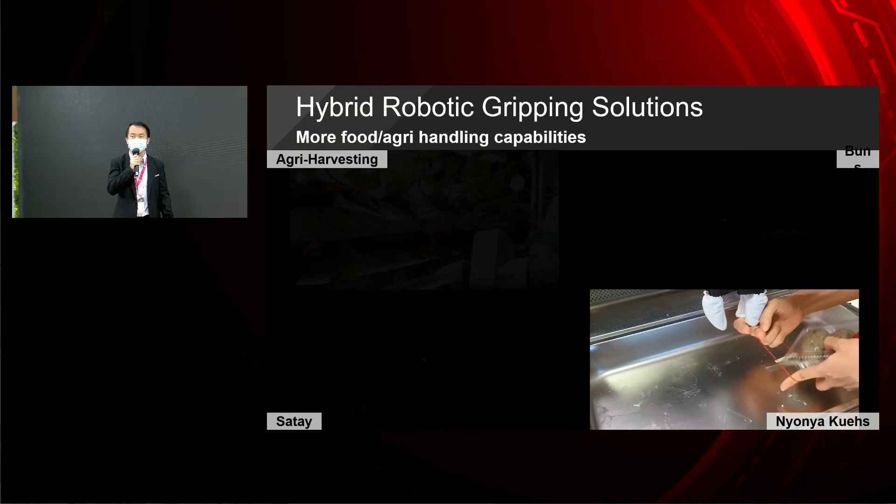If you're familiar with our local food, Nyonya Kueh is one of the very delicate items we are also looking at. These are very delicate food items that, if you pinch them, might just burst and fluids will come out. With the use of this soft gripper, we can work alongside human workers to help increase productivity, and we do not need too many workers working within a confined space.